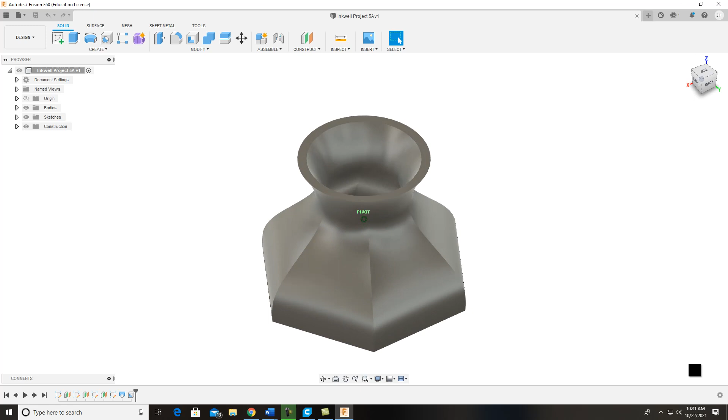So what we're going to do first is bring up my model in Fusion 360. This was project 5A in week 5, so you should already have this one done. And I am going to make a G-code so that I can print it.

Alright, so the first thing I do is make this an STL. You guys remember how to do it. Just go over here to File, go down to 3D Print, you can actually do an export, but I'm going to go to 3D Print on this. I click on it.

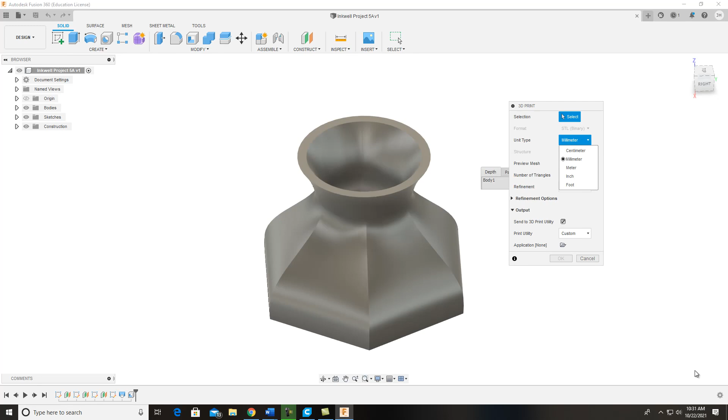Make sure that I am in millimeters, preview mesh. And also refinement - I want a really high refinement so that my triangulations can be really tight on this, because there's a really thin lip on this inkwell, so it has to be a really tight bond there. I'm going to turn off send to 3D print utility and hit OK on this one.

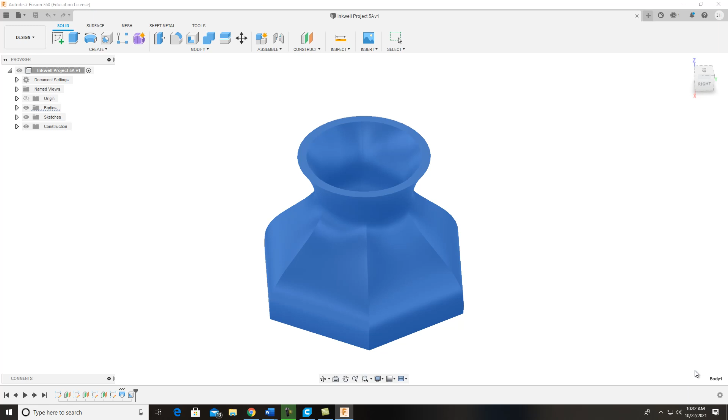And of course, I'm going to send this to my DPT 100, and I'm just going to type in inkwell for the STL file.

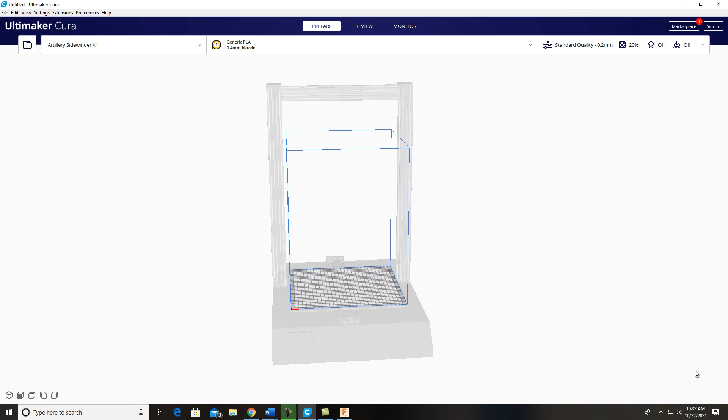So now I've got my Cura slicer up. When I bring this up, there's a lot of cool things. This right here, I put it in isometric - you can look at it from the front, top, side. And the first thing you want to do is set up whatever 3D printer you're going to print to.

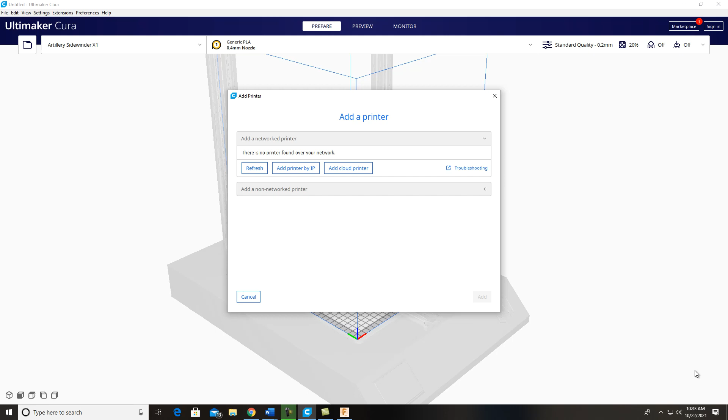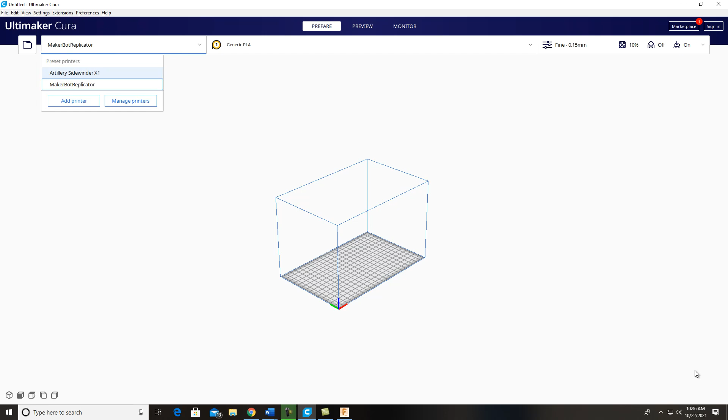We already set that when we first started with the Artillery Sidewinder X1. If you need to add another printer, you can, and I'm going to go ahead and do that right now just to show you how it's done. I don't have these set up on a network, so I go to non-network. Maybe you have another popular one like MakerBot - you can click on it, choose which one you're using, and add it. Now you've got the different ones - you've got your Sidewinder, you've got your MakerBot. So again, we're using Artillery, but that's how you do it. That's the first thing you want to do, is make sure you are utilizing the correct printer.

Now the next thing is right here, you've got generic PLA - that's what kind of material we're going to be using. PLA is, in my opinion, in FDM 3D printing, the most easy, easiest plastic to use, the easiest material. Seems like it doesn't have a lot of shrinkage, and it has a lot of great properties, and it really produces a great part. It just depends on what you're doing, but for larger parts it does really well. So that's what we're going to be using to start out with.

0.4 millimeter nozzle, that's the standard nozzle in FDM 3D printing. Sometimes there's a little bit different ones out there, but 0.4 is the standard. Now the standard quality - over here there's different quality levels, and we're using 0.2. That's how thick the material is printing. I mean, you can go down to 0.12, you'll just have a lot more lines. So we're just going to use 0.2 to start out with.

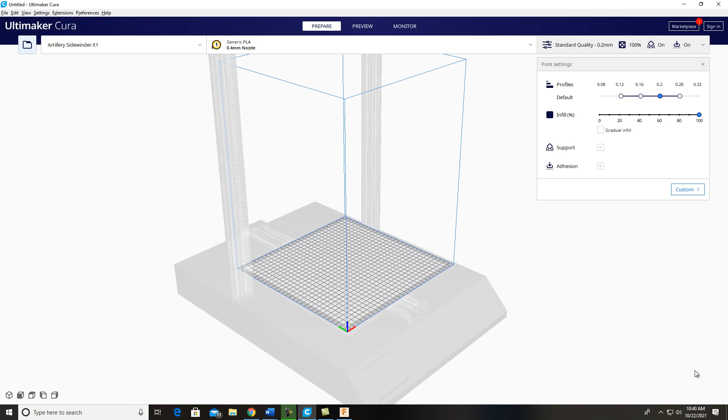Next thing I want to do is come over here to the folder and open up that project. Let me go in here and find it. DPT 100, my STL file is Inkwell. Open - and there it is.

Now we have the part on here. It's going to be really important that you have put it in here and it's scaled accurately. Down here it'll tell you the dimensions of the part. This will help you to see if it's been brought in accurately or not. These are in millimeters - that's what we designed it in.

I've seen it before - people draw something in standard inches and then convert it, and it'll print millimeters. Well, it's going to be totally different in size than what the part actually is, or vice versa. You draw it in millimeters and it's in inches, or even if it's in millimeters, sometimes you see centimeters. So make sure that it's scaled right, and you've got lines here to help you see that - this little grid.

Also make sure that the part - if you click on it, just click on your part, click off of it, it goes off. But if you click on it, you can actually move it. All you have to do is just grab your grips here, and you can pull it. There's no use to pull it up because it needs to be flat on the build plate. I can just move it around.

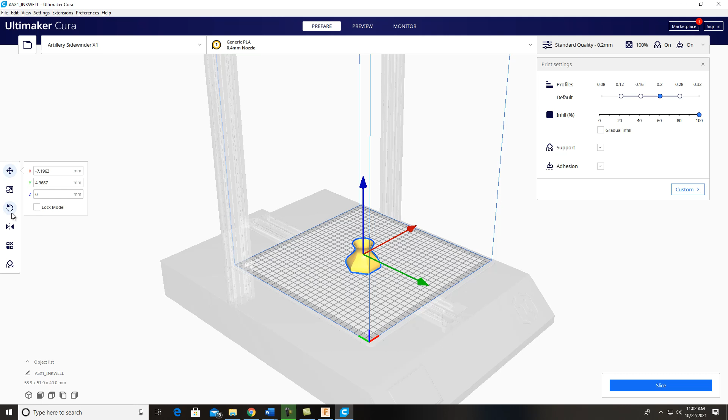Now, if it didn't come in here flat on this, you have a rotate right here, and you can rotate this part however you need to rotate it, to get it flat. But I want to be on this flat here, so I just reset, so I want to be right back on that flat. So you have that option if you want to use it.

So I'll go back to my isometric view. You also can click on it and go to scale, and this portion of it lets you scale the object larger or smaller. But I want to go back to my original.

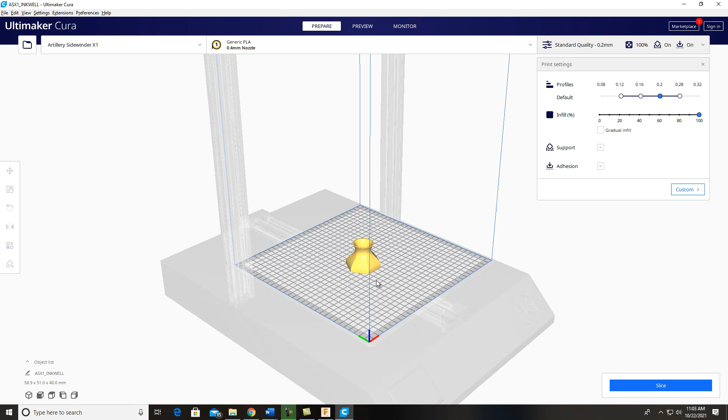The other three areas we'll get into a little bit later, but for now this looks great. I'm just using the wheel on my mouse to scroll in and take a look, and you can smash the wheel down to pan around a little bit. Everything looks good, we got our printing settings ready to go.

Everything looks good, and I want to come down here and hit slice. It's slicing it right now. All right, so it's going to take me 1 hour and 57 minutes to make this, and it's going to take 18 grams of material, so that way you can calculate how much material you're using whenever you have to order and buy material.

One thing you got to realize too, we're doing 100% infill. That means this part is going to be solid. If you have an object where it doesn't have such a thin little layer like we have, a big part, you can go more sparse with it in your infill, and it would be kind of hollow, like it's got a honeycomb inside of it, and that reduces your time and materials. So that's one thing to think about, and we'll do another part in the upcoming days and you'll see that.

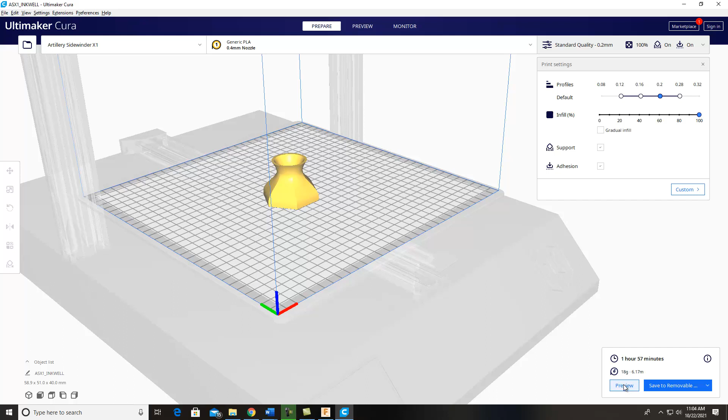So 1 hour and 57 minutes, basically 2 hours to do this, and you can hit preview right here if you want to take a look at this. Did you all see it when I hit preview?

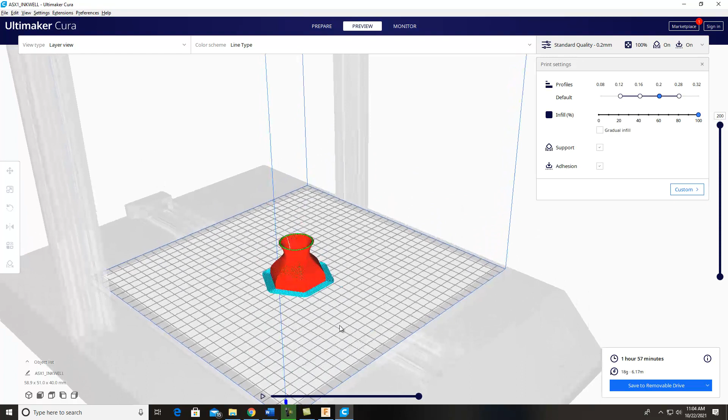See right here, it's showing you, this right here of course is that raft, that adhesion raft on the bottom of it. And for support, it didn't have to have any support because we laid it out perfectly. The thing of it is, on the inside you're not going to have support just because on this one, on the inside of it, it's going up at an angle. You have radiuses, and it can build on top of itself. There's nothing really overhanging that needs some sort of support.

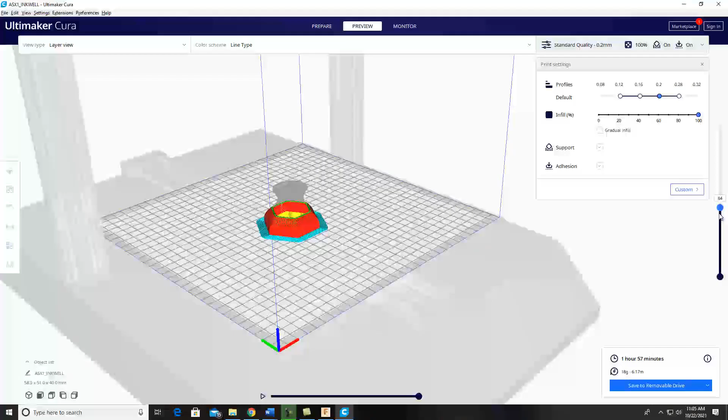Now I want to show you with this preview on, over here to the right you can actually come in here and cut it and look at how this thing is being built. You see that? So as it's being built, there's the raft that it begins on, down here in the bottom.

And then here we go, it takes off and starts building. You all see the walls coming up. It'll keep building, and then it starts to do the curve and goes to the top. And there's your part.

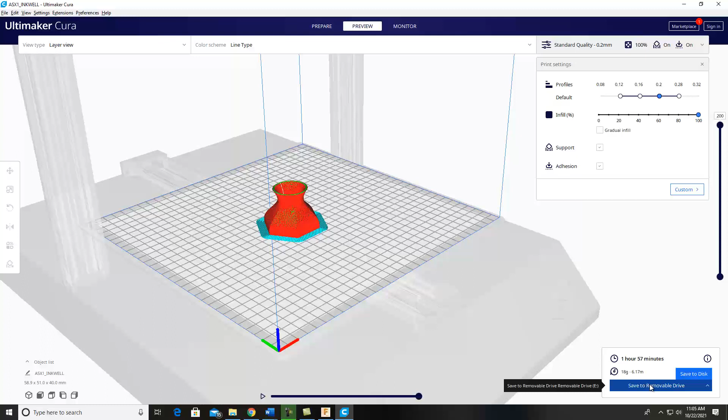So what I want you guys to do, of course, is save this somewhere, okay? Save to disk, save to removable drive. I've got my E drive in, a flash drive. It's just going to let me take that flash drive and go straight to the machine and plug it in, and it's ready to go. So I want you guys to do that, save it.

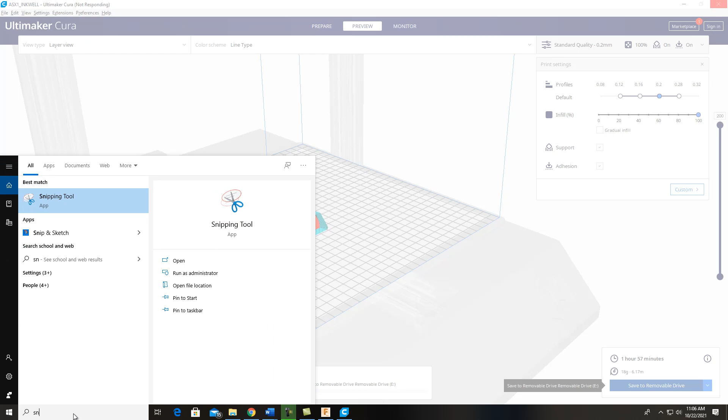And it's building the Gcode right now. I'll come in here and do snipping. And what I want to do here is I want to take a picture of your part, okay? And file save as, and take it somewhere where you can access it.

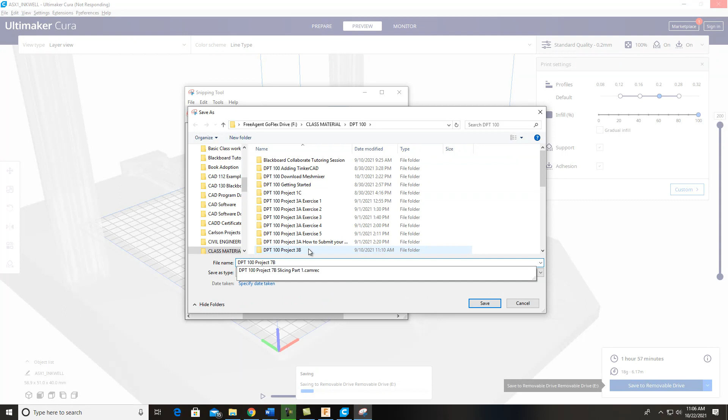This is DPT 100 Project 7B, and this is the Cura slicer. I'll put 1, save. So I got that part saved. Oh, I didn't have enough space on my E drive, so I'll have to save it to something else here in just a little bit.

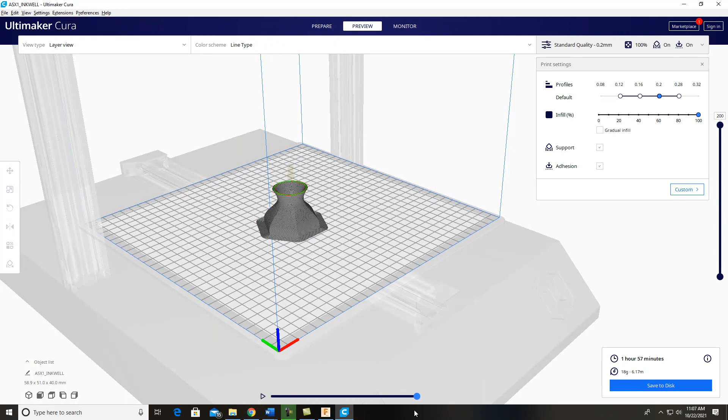But also, I want you all to pull this thing down a little way so you can see inside of that, and I want you to do another picture for me. Okay, snipping tool, and we'll do us another little shot of it.

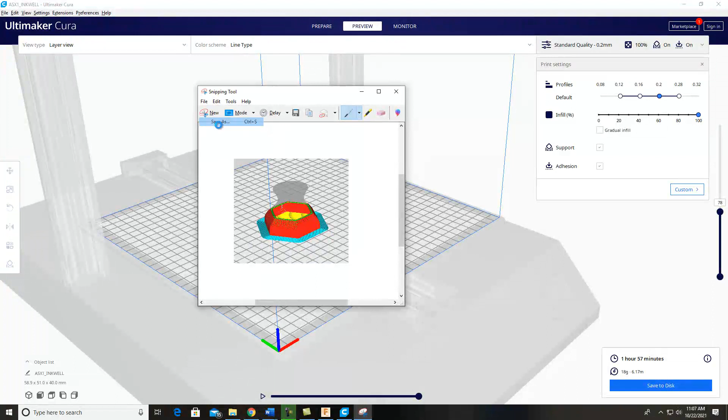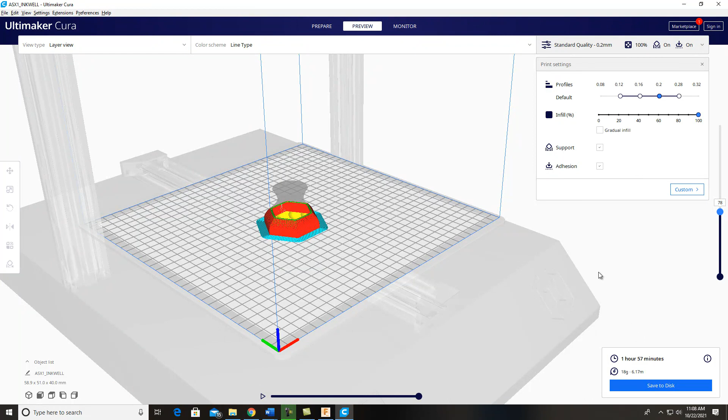I was changing the last to 2, so I know where it's at, just for future reference. And again, you want to save this. You want to have enough room on your disk to be able to save it onto. But I want you to make sure that you get a picture of this, and also get your Gcode file saved. I'll show you in another video how I want you to submit all this. So if you have any questions, just let me know.